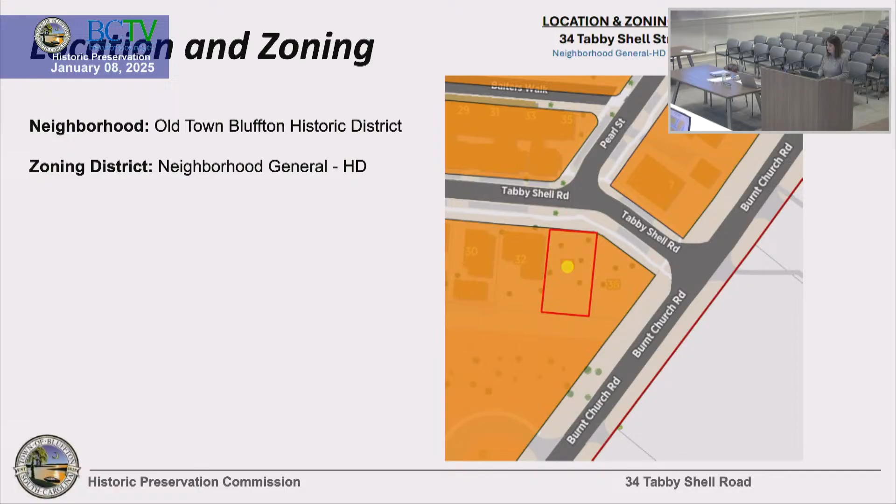Here you see the property. It's close to the eastern portion of the development near Burnt Church Road. An aerial photograph shows the property is currently wooded. And here is the site plan, with Tabby Shell Road here at the top.

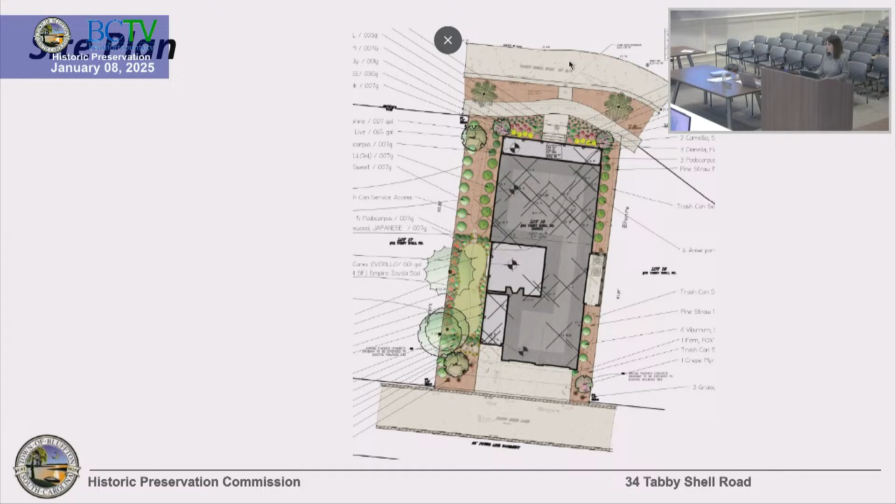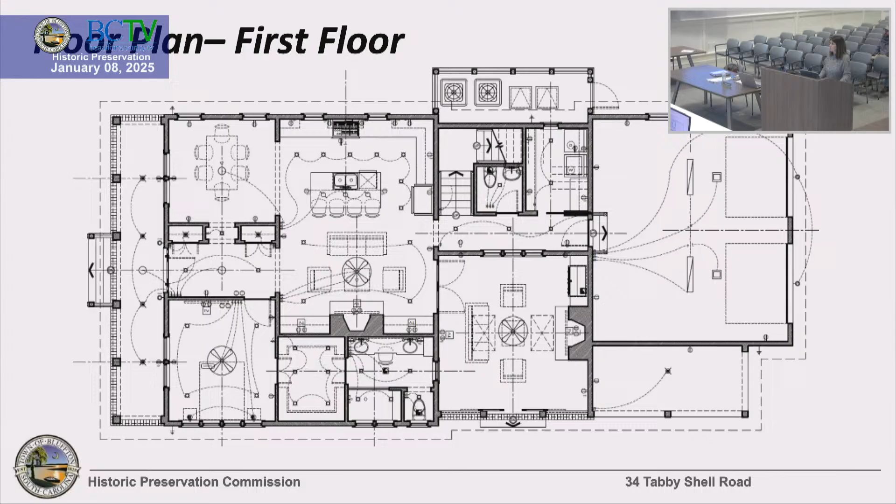Here is a view, and I'll go through these quickly and we can come back to them: the front view, the left view, the rear view from the alley, the interior view of the back of the house and the carriage house, the view of the left side of the building, roof plan, building section, foundation plan, as well as the floor plans, wall sections if we need to see them, the door and window details, and the review criteria. All of the review criteria appear to have been met except for the items that I'm about to go over.

Based on what was resubmitted, there are some detail items that we need. For example, identifying the type of the tabby stucco, or whether it's going to be a stucco with a sand or steel trowel finish—that needs to be identified on the plans. We've asked for a door schedule to identify the types of materials proposed for the door. We are also asking for an additional column detail, as what was presented was a little bit difficult to read.

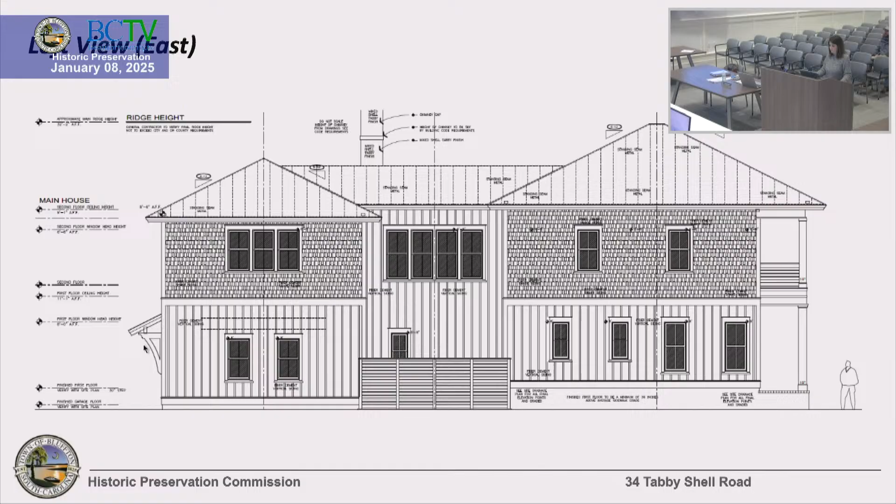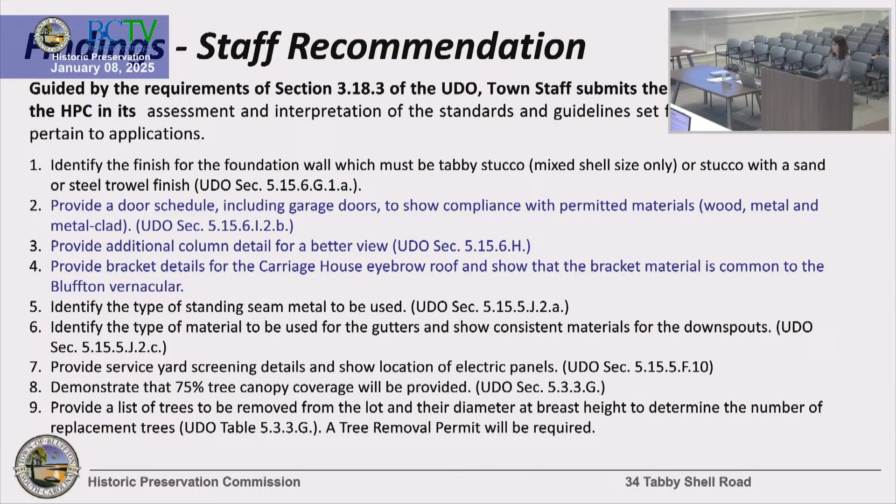Additionally, provide bracket details for the carriage house eyebrow roof and show the bracket material common to the Bluffton vernacular. I did not see that on the plans, and you can see the bracket detail here in the back over the garage. Identify the type of standing seam metal to be used, the gutter material, and provide service yard details showing the location of the electric panels. We'd like to see that 75% tree canopy coverage is provided, so that will need to be shown on the final submission if the COFA is approved tonight, as well as the trees to be removed.

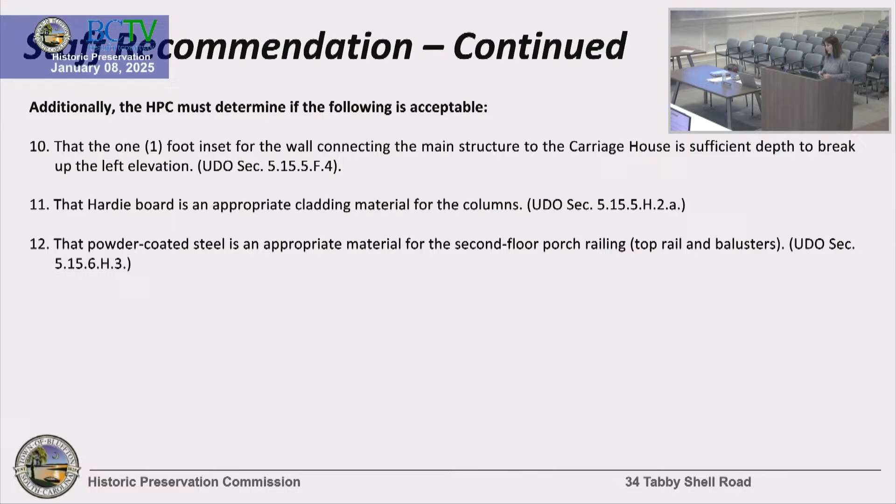I did identify some things I thought needed a determination. They include the 1-foot inset for the wall connecting the main structure to the carriage house—I'll go back to that—whether Hardie board is an appropriate cladding material for the columns, since it's not identified as being permitted by the UDO, and also a determination that the powder coated steel proposed is an appropriate material for the second floor porch railing.

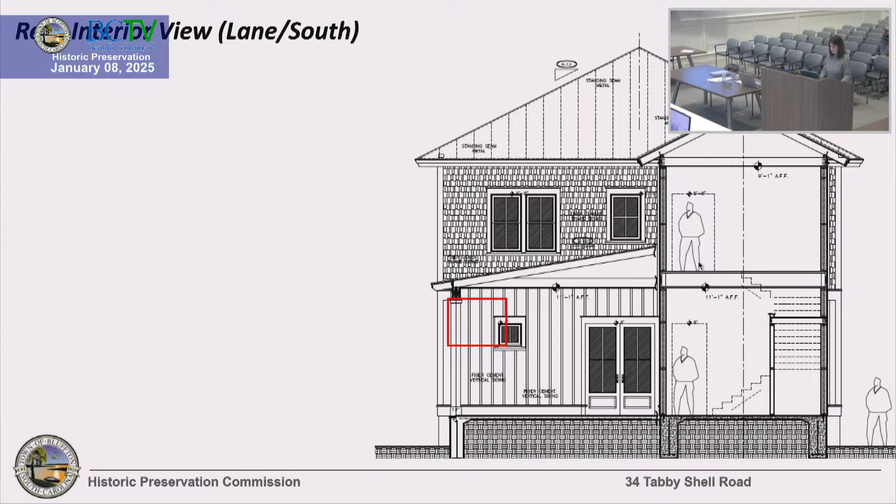Let me go back to that, and you can see here in the porch railing—let me show the front elevation so we can see that a little bit better there.

And after I was putting this together, I did notice, looking at the window schedule, that the windows I've identified here in red appear to be awning, and I think maybe the applicant can speak to that. But other than that, that pretty much is my presentation.

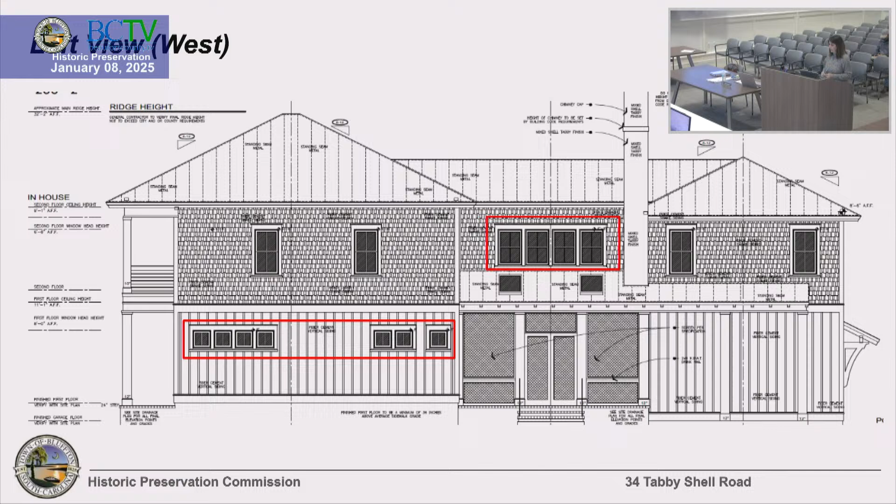You can choose to approve the recommendations of staff, you can have additional conditions, or you can deny what has been presented to you.

Any questions for staff? There was an application page in the packet, like page 3 of the application, there were 2 copies, and there was a red note in the top that one was different than the other. I didn't see any differences.

Was that something you annotated? It was, yes. I'm sorry, I'm trying to recall, it might have been a number change. There was something, it was a very slight thing. But as far as all the square footage, you checked that, and that's all in compliance? Okay.

In the comments, a couple of them were in blue. Did that indicate anything separate? In blue, do you mean that I just went over? Yeah, your recommendations. Yeah, those were the things that I focused on. I didn't want to get too far into the details of materials. Those are kind of standard things that we include, and it's really more for the applicant to provide final submission.

Any other questions for staff? Any questions for the applicant? Does the applicant want to present at all?

We're happy to answer any questions. We made a list of the things that we had discussed last time, and I think we've addressed all of them. If you could state your name, for the record. I'm Graham, and this is Preston Glover. And you are the applicant with Alley Construction Group.

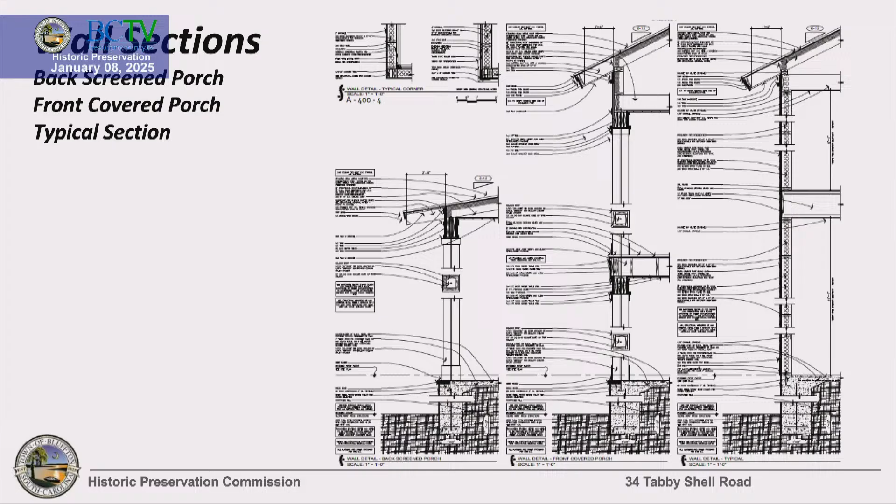I can't see on this computer, I'm sorry. Can you blow that up? Kind of the middle. Go down a little bit, and it's going to be legible. Which one is it? Is the middle? So the second floor right there - right there? Middle one, yeah. Can you zoom in? Can you see that writing, or is that probably going to be pixelated?

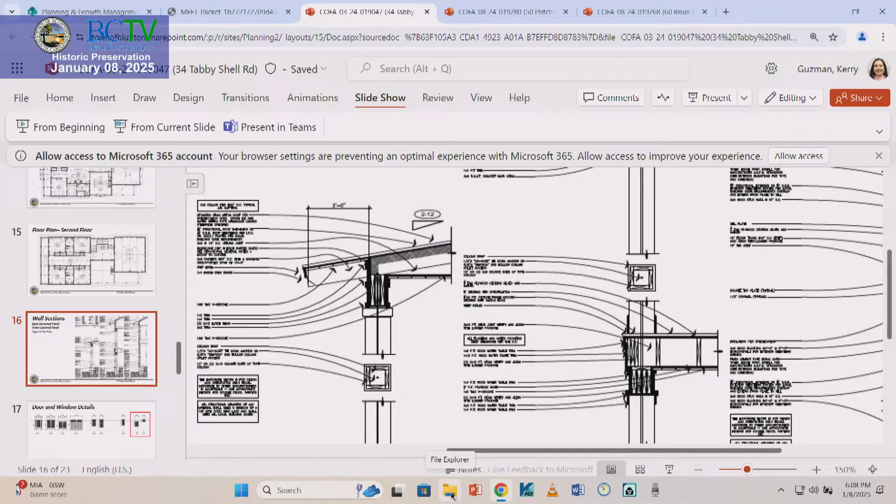Charlie, are you able to pull up the actual plan set rather than the PowerPoint? I don't know if I can get to it. Can I get to it from here, Kerry, do you think? What's it in? Yeah, so we have the plans here as well.

Just looking at that detail, it's called out as 5/4 decking on top of 3/4 inch tongue and groove plywood decking, glue and screw. So I think Tim's question is, there's a lot of banding going on there, and that's an odd way to do the waterproofing, and that would potentially, if you put it on sleepers or something, that would really affect it. So you'll have a slope you gotta create - so that'll be one sleeper, and then you'll have another sleeper on top of that, so the water can drain in between it. So my concern is that banding will get really tall.

Because there's more depth in there than what's showing. Understand what I'm saying? Yeah, to be honest with you, I haven't thought much about that. I knew we're probably gonna do a waterproof membrane there, and I didn't necessarily know if we were going to be doing decking on top of that membrane or just leaving it a membrane.

But if that's what he's got in the plans - it's called out as decking. I think it needs to be decking, I don't think it can be a membrane. Yeah, I mean, I think it would be unexpected in the historic district and in Tabby Roads to not have some sort of finished flooring on the second floor. Right. Yeah, then we would do 5-quarter pressure treated decking.

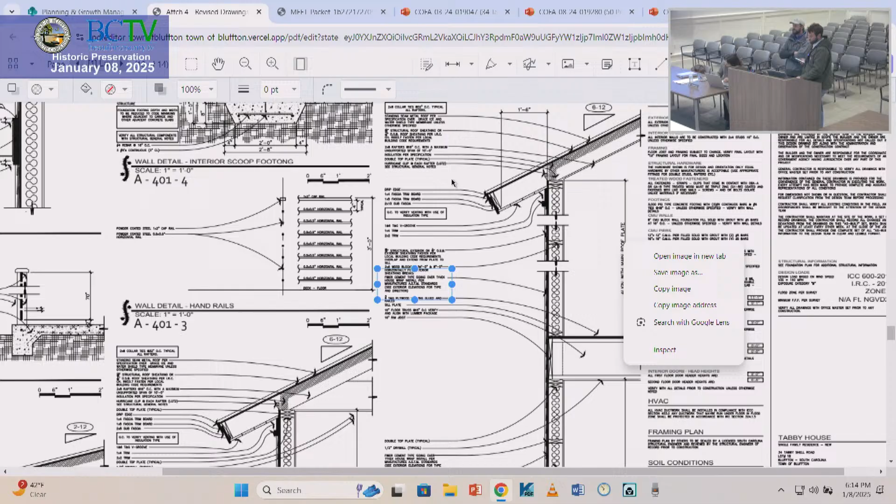So other than just clarifying on the detail that the top is shakes and the bottom is board and batten and the band board - that needs to represent what's actually being built. And that calls out the board and batten's spacing, the pieces need to be called out, what the actual board is, basically all that. And then the band board calls out what the sill is that's on top of the band, all that stuff called out and detailed.

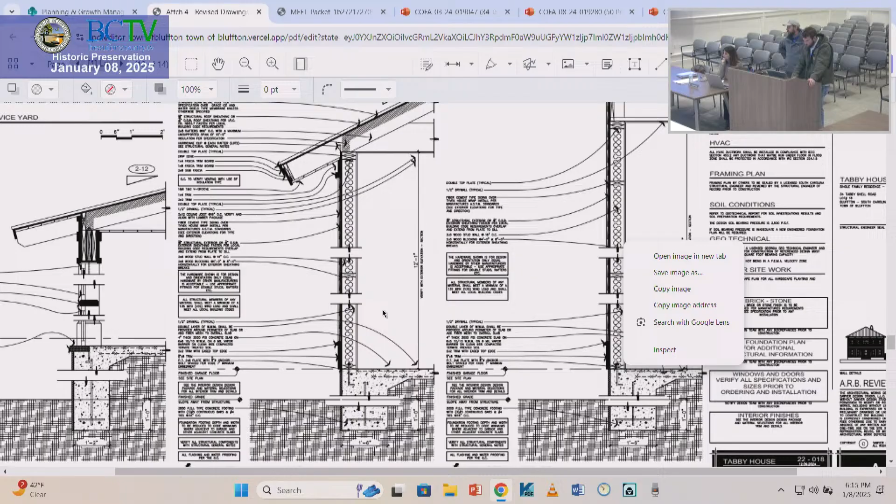The column details are updated as well, but they're just graphically shown, not actually called out with parts and pieces. And then when you look at the top of the porch, they removed the bracket, they kept - none of the bearing height or anything is right, so it doesn't really show, and all the elements are hidden. So like this one that you're pointing at right now - that one - none of the parts and pieces of the beam trim are called out.

Size, spacing, anything like that. But it is graphically a better representation of what's going on, I think, on the second floor porch. This is the screen porch detail.

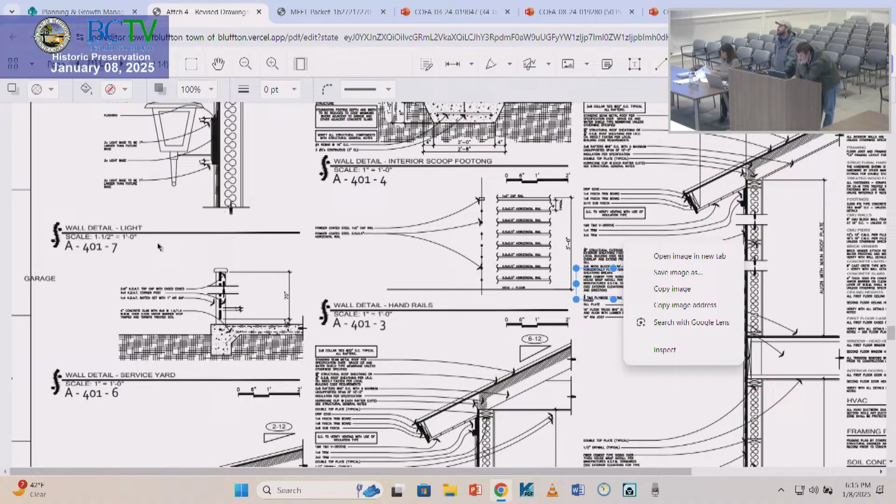Yeah, but if you scroll up to the second floor porch, I'm pretty sure it's supposed to have a similar height to that, but it is like 2 feet taller with some board and batten siding shown that I think from the elevations looks like it doesn't exist.

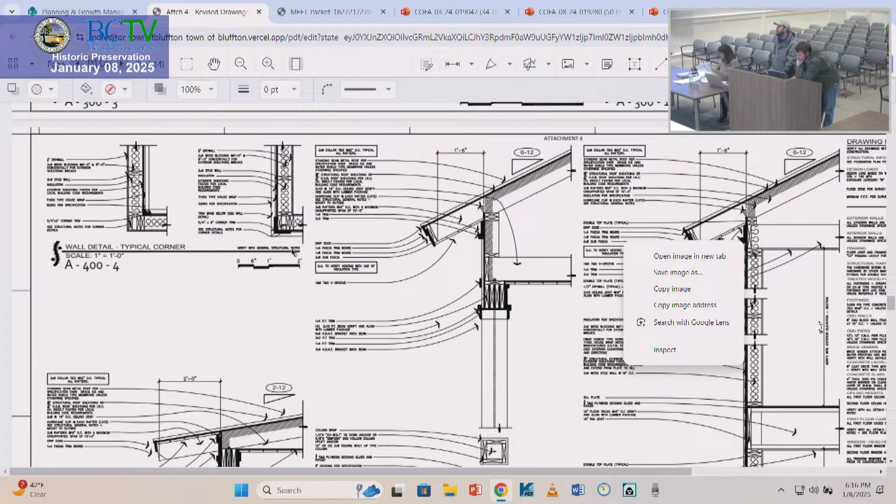Yeah. If you keep scrolling up. Keep scrolling up. Yep, that top in the middle, right there. This piece here. Yeah, I think your roof, I think there's, when you're looking at the beam on the porch,

and then the ceiling, and then the top plate there, I think the roof, visually from the elevations, looks like it's sitting on the sill plate on that little knee wall, but it's another taller, and there's siding in there that's not called out, but I don't think any of that siding exists.

I mean, it's hard to. You're talking about this siding here? Like the frieze board and this piece right here? Yeah, but that stuff beneath it, if you look on the elevation, none of that siding is.

Well, you wouldn't be able to see that from the elevation because the eave covers it. We're talking about like this where it calls out the 1x4 trim and the 2x2 trim, the frieze board. On the elevations, it's like the bearing is another 2 feet lower than them.

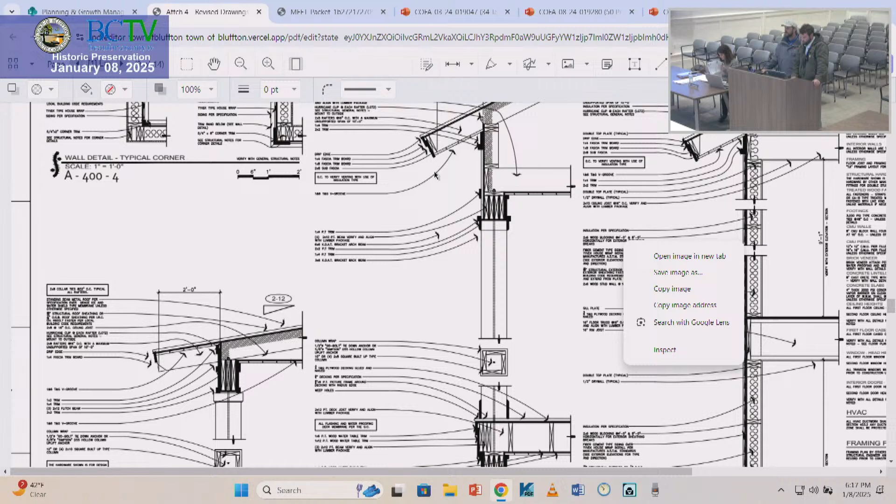I think, when you look at the detail in the center and where that beam is, and you look at the detail in the bottom left and where that beam is and how that trim stacks, that trim stack looks more like what is in your elevation on the higher pitched roof than the one in the middle.

This bottom left one here? Yeah. Uh-huh. Yep. That's right. I mean, there's definitely more height space on that.

So I think the larger concern of what we're talking about or getting at with all these is that we're not quite sure what we're approving based off of the details not matching up with the elevations.

I think the last time you guys presented, we suggested you might ask for a meeting with the HPRC and sit down so we can talk about these individually. That didn't happen, and I think that would help you guys a lot.

The timeline on this project has pushed in near 2 years that we've been sitting with the town. Yeah. We worked with Katie for a long time, and she dropped the ball many times. I know she's not here anymore, but a lot of these things could have been addressed a year ago.

Well, at the HPRC level, we're not reviewing, I mean, it's an elevation and floor plan review. Right. We've seen these details at this level once, to my knowledge.

You guys went around in circles with Tabby Roads. What's that? Because they're requiring things that you guys aren't approving. Well, no, I'm not sure really what's going on. I know we made a list last time when we were at this meeting, and I thought we addressed everything on the list.

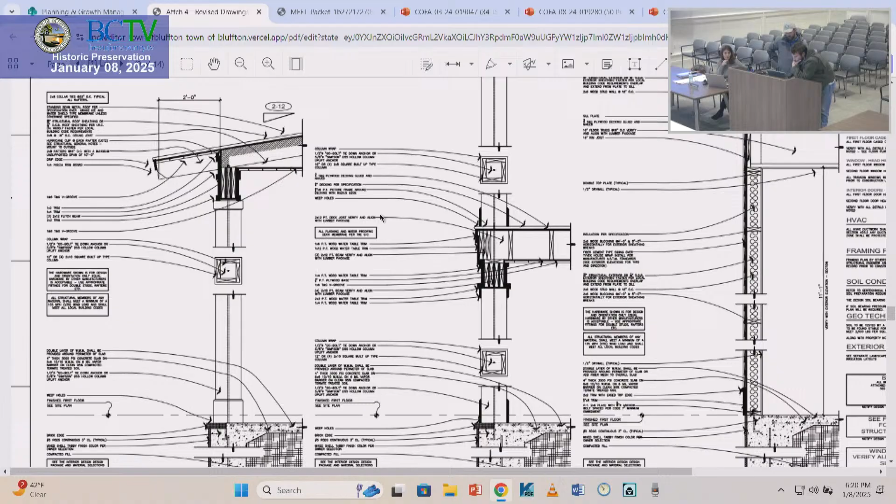I know you guys have taken a lot of time in the review process. Not all of it has been HPRC's, but this is the second time you've come in and told us you're not going to build on the plans you're submitting. Look at the plans, there's obviously small discrepancies. This is the third property we've built in historic downtown Bluffton, so we have a pretty good idea of what's been approved and sold for $1.4 million.

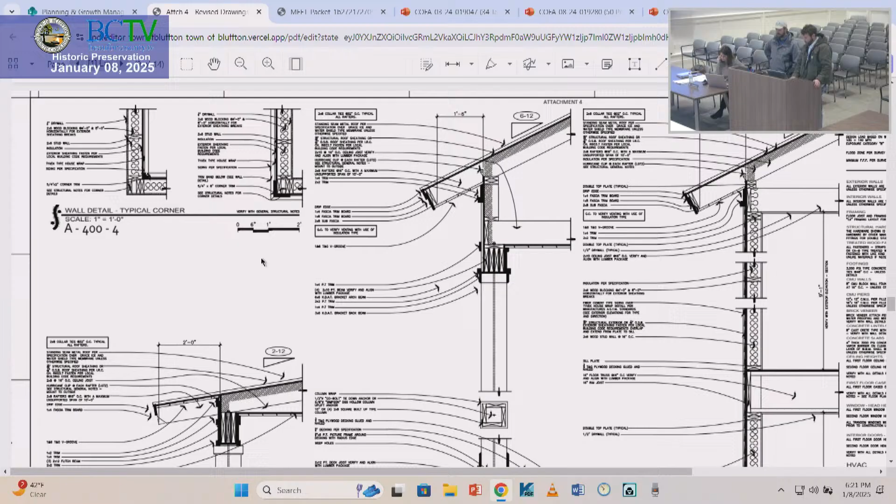And this one, like I said, the siding guys, our siding guys, we just scale based on, and typically also with ARBs and this architectural review process, typically that's what they're looking at is the elevations.

I understand 100% you want this to be right, I'm just trying to figure out exactly. So that scale right there doesn't match what's on the elevations. We're not scaled, but if you look at the elevation, it looks like that whole soffit is 2 feet further down.

Because if it gets built like this, you're gonna have this weird thing that's not really called out. I think what you really want is a column or a beam, and then you want that roof sitting on there so it looks just like a beam. And this thing, it looks like there's the beam, and there's siding or something that's not specified above that, which is not what we want.

What's probably gonna happen is these ceiling joists for the deck are gonna hang off of this column, or off of this beam, and the rafters will probably sit on that knee wall. I think that plate, there's probably one piece of plate on top of that. In actuality, yes, the ceiling joists of the deck will hang off of this beam, and the rafters will sit on that beam and be anchored to it.

Okay, so this needs some adjustment here. I think by that picture or the elevation, the plate is the plate of the header, and then that joist is notched out. So the ceiling joist plate is sitting on the plate of the header, not on top of the plate of the joist. So that whole thing, I think it's way down. I think that joist is actually sitting on the header plate where the top of that rod is.

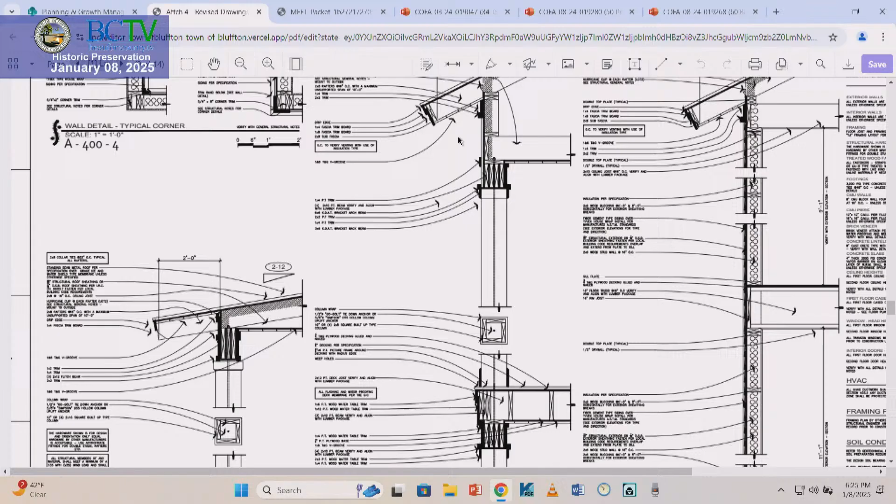But other than that, is there no way we could approve it with conditions and get those fixed? Well, even there, you said it might be a 1x10 or it might be a 1x8. That's a small thing that can change, but you start to stack all those up, and then we end up with a project that could look very different from what we approved.

And I appreciate that you've done other houses and they've turned out well and sold well, but we take them on a case-by-case basis, and we want to be thorough and make sure that what we're approving is right. Could we address everything that she brought up? Sure, in terms of just making sure we cover all these bases? Yep, that'd be great.

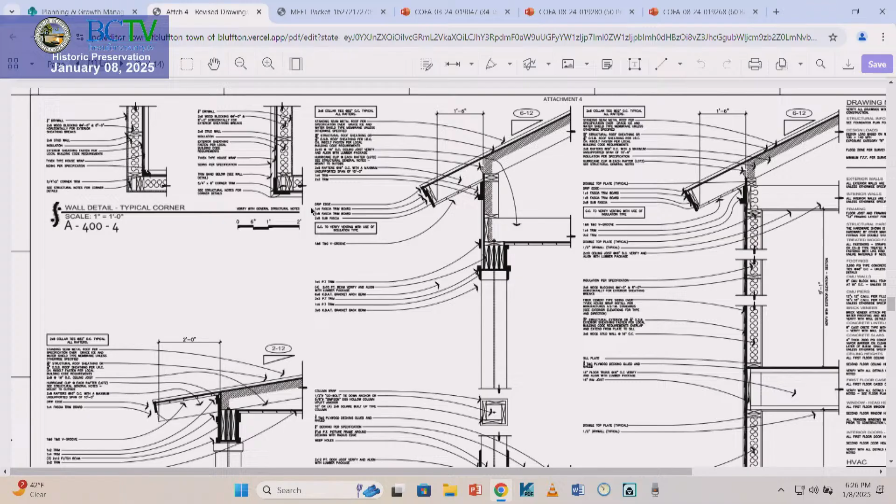So other than the details, the elevations look good to you guys? I think the inset on that corner, the inset that went from 6 inches to a foot, is a welcome change. The bracketed roof over the garage rear elevation helps, as well as lowering it with the scale - I thought that helped a good bit.

What else did we talk about? The 9-foot door at the front changed to 8 feet - looks good. Lowering the roof of the garage, which was the 1-foot piece. We got rid of the faux windows and moved them into real windows on that side elevation. We put them in the location that you guys suggested.

I had a question on the chimney cap rotating. Are you using a masonry chimney, so then that won't have a spark arrestor, so we're not concerned about seeing a metal spark arrestor cap sticking up inside of the bishop's cap?

No, it's not - you're talking about the flue of the chimney being like the masonry chimney? So the flue of the chimney is gonna be metal? Yes. I think I would like to see that chimney cap rotated back, because I don't think from the street you want to be looking at it.

I saw a note, there was a note in the staff report about them rotating it to be away from - it said Bruin Road, which was not right, that'd be Burnt Church. I know, but it said Bruin, that's why I was confused. So, and it says that it was rotated, and there's also a house separating from Burnt Church. There's also a house - yeah, I know, that's why I was confused by that note.

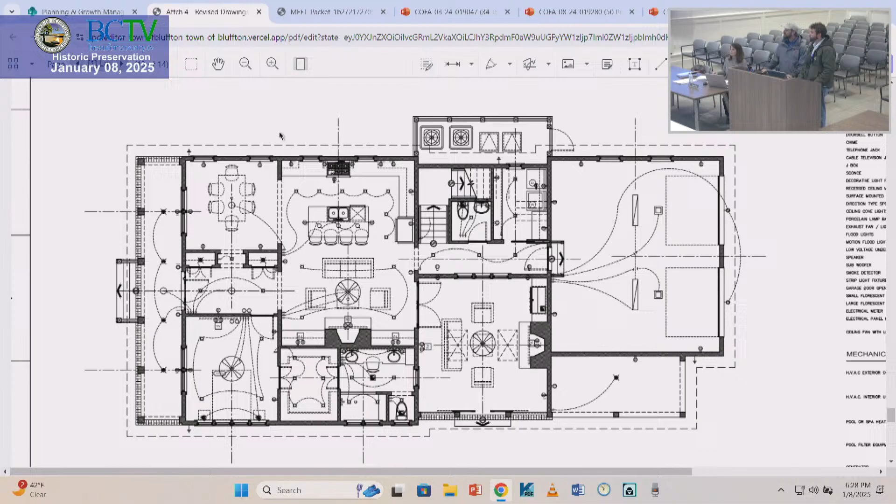Can we go to the elevations? Can you flip to the side elevation? Just a small comment. Yeah, that's good right there. I appreciate that they lowered the roof.

I think I'd probably want that connector to be the same level as the garage. Is there a reason we couldn't move that connector roof down, so the main house reads as the main house, and the connector and the garage are a foot lower? It looks like the windows and everything would be in the same plane, so I don't see why you couldn't lower that a foot, so it reads as a connector and the main house is a little more prominent.

Right, understood. I think this is technically part of this floor here. But the back part, the garage and bonus room, is the same floor height too. You'll actually enter the bonus room from this landing here, and then go up a little bit, and this floor is connected to the main house.

I think that's why we liked that, we talked about it, but I don't think the plans reflected it. The plans look like it's all the same level. Yeah, I remember us talking about it and looking to see if we did it. If that was the case, I would vote that the garage should get considerably shorter.

I don't know whether it is, but it's not. Yeah, they were trying to keep that the same level. Everything's the same level.

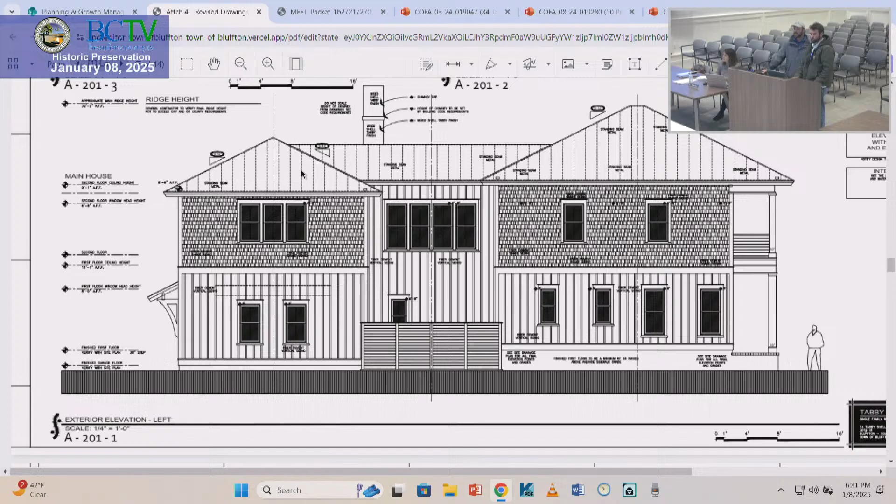Yep. Are we making a motion on this, or can we go back to review so all this discussion can happen there and we can move on? In the interest of getting the other projects before the commission, I don't feel comfortable with staff reviewing all of the changes we're talking about without putting them into a list.

That's where I was at as well. Okay, I just wanted to get it, because that's what I tried to do last time, when we had these big discussions - I got everything we talked about and we made all those changes. Now I see there are some new changes coming up.

So, a bracket detail here, you want to see a bracket detail there. We need to fix those two wall sections - one is mainly the siding, which is incorrect. You want to see a band board callout. It needs to be shakes above and board and batten below. And this detail section needs to get fixed so it matches what's on the plan - basically, the elevations need to match the detail.

But other than that, are we good with the powder coated aluminum or steel handrails? I think we had talked about that before, last time - a couple of spots in that location in the neighborhood. We've done that a couple times in the neighborhood, I don't see that being an issue.

Okay, awesome, and all the other changes we made - pretty much that, and then we'll lower this breezeway roof a little bit. And do you want us to turn the chimney? I think where I'm at is, if Tabby Roads is going to hold strong, that's something I would just approve.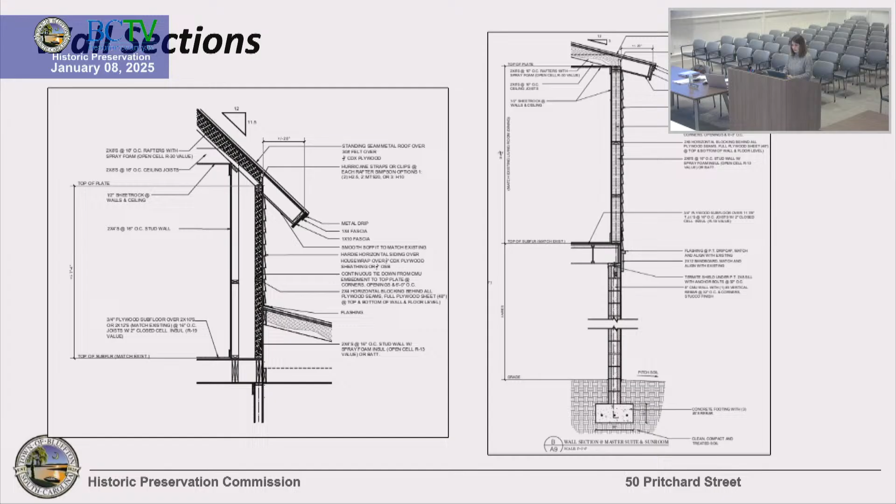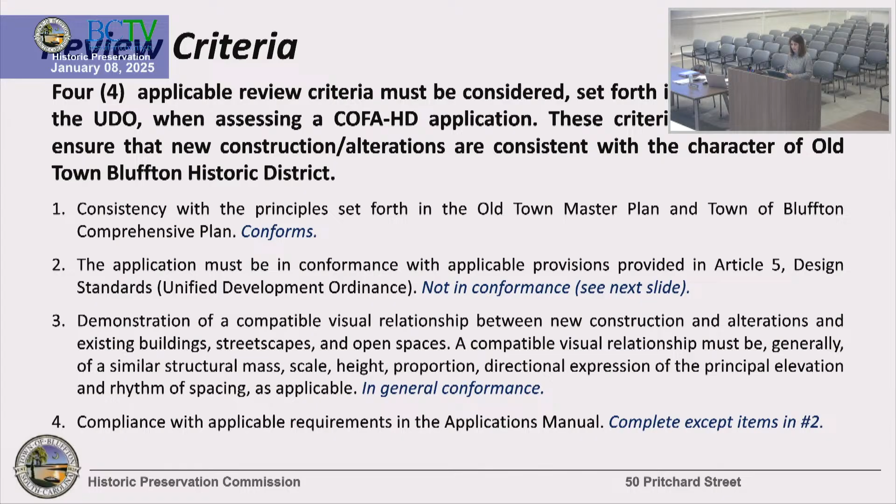Wall sections, porch details, some additional details regarding windows and doors. Review criteria is consistent with, except for a few items I'm about to mention. We need a little more detail regarding the material for the standing seam metal roof, as well as the stucco application. Staff is requesting the commission make a determination that the standing seam metal roof on the first floor addition is appropriate, given the asphalt shingles on the main structure.

Need a determination whether the lack of shutters on the addition is appropriate, given the use of shutters on the existing residence, and whether or not the rear fixed window is appropriate, as it is not a permitted configuration. That concludes my presentation—again, you have the ability to approve staff recommendation, add additional conditions, or deny the application.

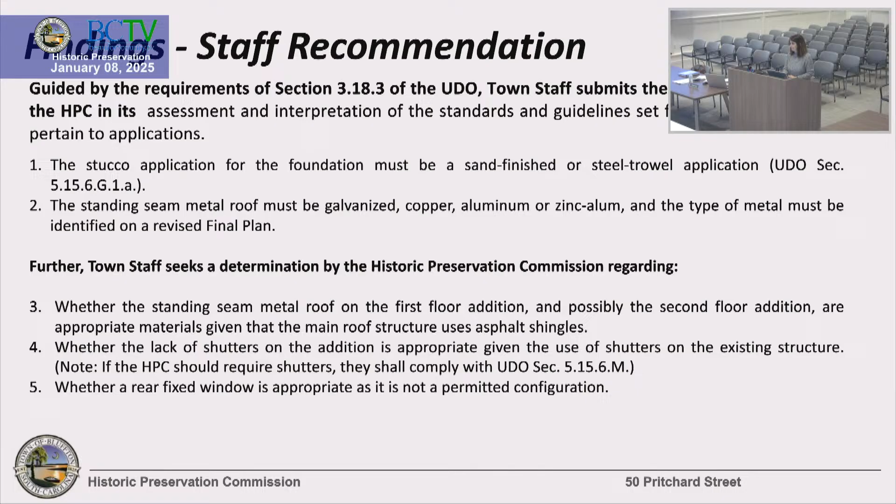Okay, thank you. Questions for staff? Okay, any questions for the applicant? Would the applicant like to come forward?

You can stay there with him. Ansley Manuel, the architect, and Beth McHugh, the homeowner. So,

Well, I'll address the metal roofs on the bottom. Let's look at this one. I don't mind the hybrid of roof materials when the metal roof isn't tying into the asphalt roof. In this case, both roofs tie into a wall, and they're both first story roofs.

Do you want another view? Yeah, we could look at the front elevation again. So you'll see that roof is going from asphalt to metal, and then the wraparound in the back will also be metal.

If you all want to discuss that now, or if I should just go to the next item. Any questions? I think it's perfectly fine to have it on the lower roof, I don't see an issue. Yeah, that doesn't bother me either. Anybody else feel differently? Okay, that should be a non-issue.

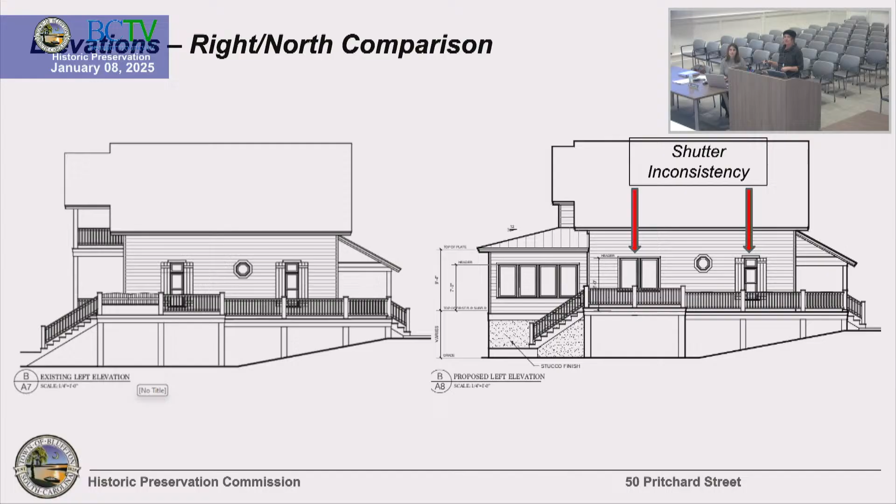So the fixed window, that's in the rear. It's actually not the one you have marked, it's the 3-gang windows, the middle one. I've got 2 operables on the end. We're looking at the 3-gang on the first level, that's in the Carolina room. I commonly do that because the middle one's a picture window.

Would those be sash set rather than direct set, so they'll have the same frame? Yeah, so if I have to make them all operable, I can. It's not going to change the look of the window at all. Right, I guess that's what I was getting at. If it's a sash set window, it's just a fixed casement, not a direct set picture with a real thin frame to it. I don't have any issue with that, with the middle one being fixed.

So are all these windows operable except the middle, is what you're saying? Yes, with the three in a row, I just have the center windows fixed. Yeah, the center one being fixed is fine, it's a pretty common application of that in the triple. Does anybody else have thoughts on that or qualms?

Okay, and then upstairs, the reason I had to even do anything up there is because I couldn't get an egress on that window unless I brought the rear portion of that bedroom forth. That's the only reason we had to do any addition up there.

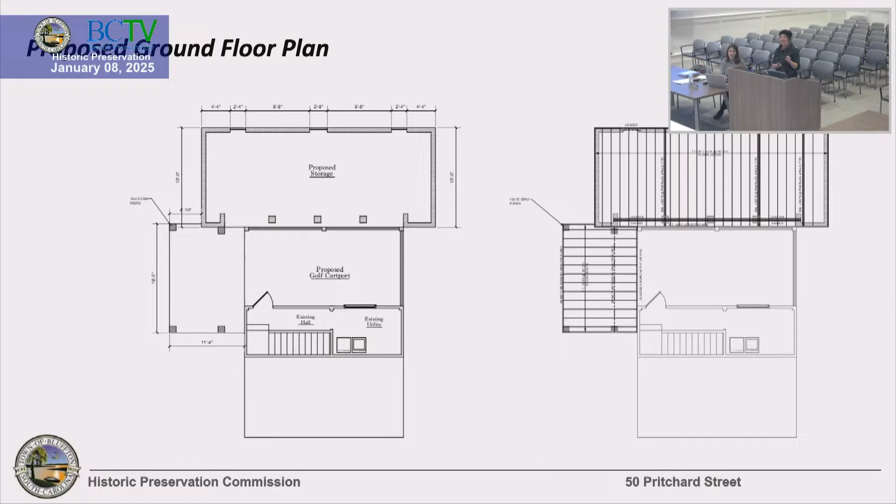Some of the windows have these long shutters, some don't have shutters. You can see the rear doesn't have shutters. There was one more photo of the rear, I think. You can't really see it there. So the rear doesn't have shutters at all, and I'm not so sure I actually think those shutters are very attractive.

But I will, we can have some shutters, they're hurricane shutters, but they do serve a purpose. So we can lose the shutters if that's aesthetically what needs to happen, but I'm wondering, and that's something we can talk about. It seems like one of the things we're discussing is all shutters or no shutters, and what Beth is saying is the shutters that are there function, so that's nice. If there's a hurricane, they can actually use them.

But in the back, I've got so many windows that are multiple windows in a row, it's really hard to try to match shutters with what mostly on the existing house is a single window with shutters. Especially when the new windows are a different style than the old ones too. So I just went with no shutters in the back. Yeah, I don't think there should be shutters on multiple windows. Maybe that single window would have a shutter since it's on everywhere else, but multiple windows, I would definitely not have it.

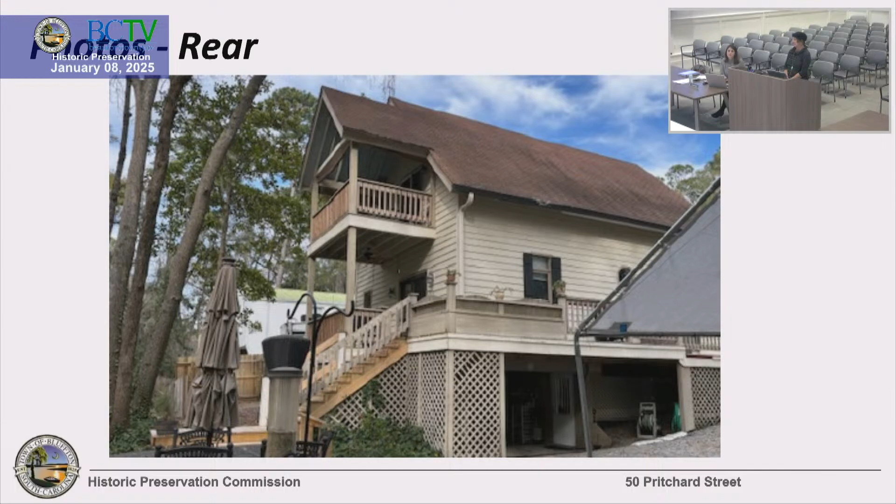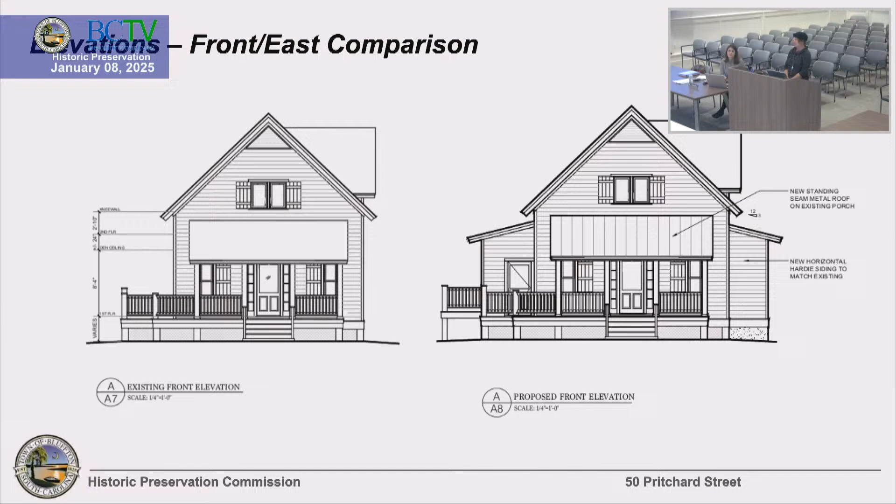And shutters need to cover the windows, so obviously a 3-panel one, you really can't do it. Double, they have to be the same size. It's on the front there, but if you're gonna have a shutter at all, just have that single window in the back, not the doubles.

Yeah, that'd be the only place I would have a shutter. And then does that look silly when all the rest of the windows back there don't have shutters?

Right, I mean, if it's a double window, you wouldn't expect shutters. If it's a multiple window, you would not expect shutters. The individual window is more akin to the double-hung windows in style. It's kind of a transition from the front to the back as you go to the casements that don't have the sash in the middle.

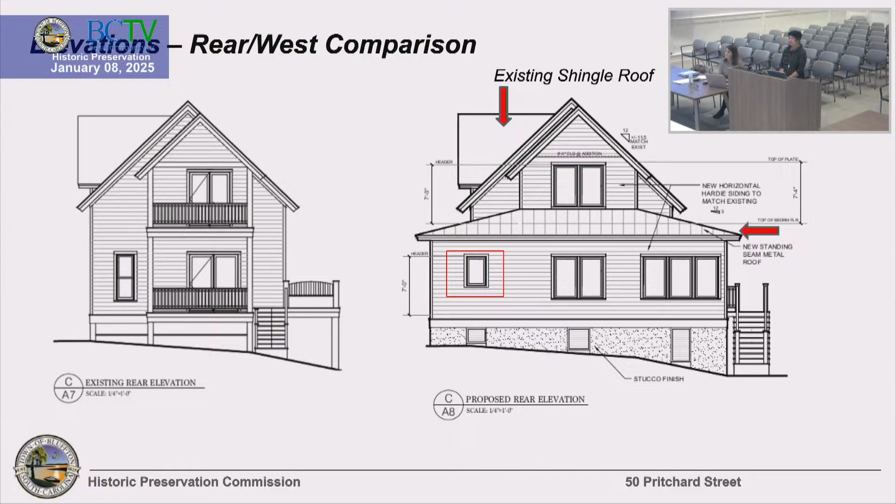Is there any other commissioners? Commissioner Frazier? If it's in the back, no one's going to see it, so rather than make you rip off your shutters that work just fine.

I think the shutters are a nice pop of color as far as kind of the eccentric look of Bluffton. But that window is side by side - the existing window back there didn't have the shutter, so I think that's overlooked.

Any other questions for the applicant? Thank you. All right, then we are looking for a motion.

Or I guess we need to obviously make a determination, but it sounds like we were in agreement that all three of those we were okay with.

So someone would like to make a motion? I'll make a motion to approve staff recommendation. I'll second that. Any discussion? All in favor? Aye. Aye. Any opposed? Okay, the motion is passed as approved by staff with the determinations agreed upon.

I know that wasn't said, but, okay. Second.

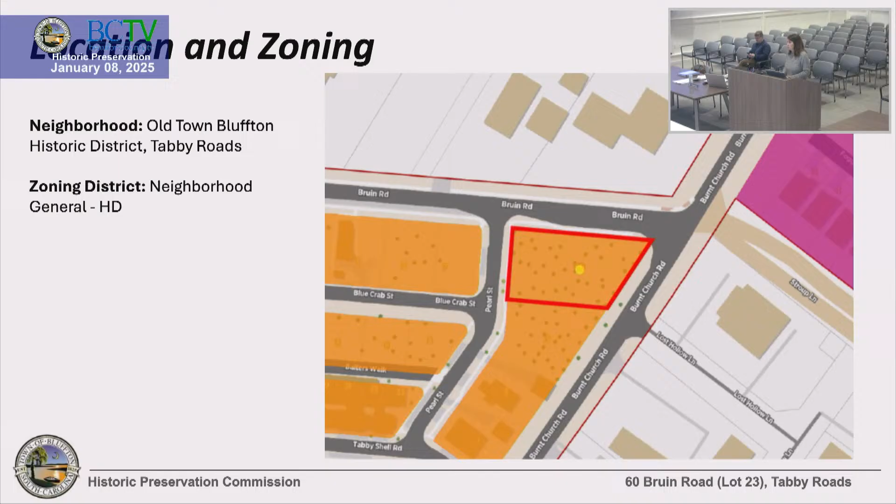Here is the location of the property. It fronts Bruin Road between Pearl Street and Burnt Church Road. We did contact Beaufort County to see if there were going to be any improvements or anything required of the property owner. Due to improvements to Burnt Church, there will not be, so everything is fine.

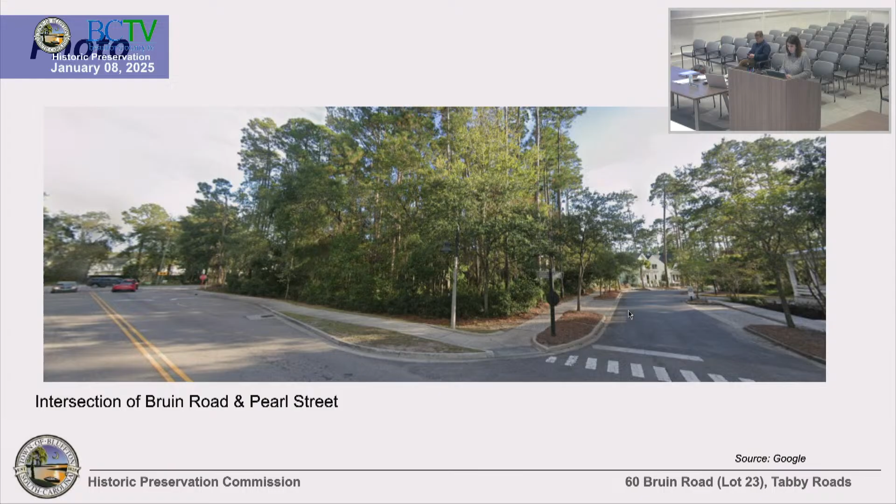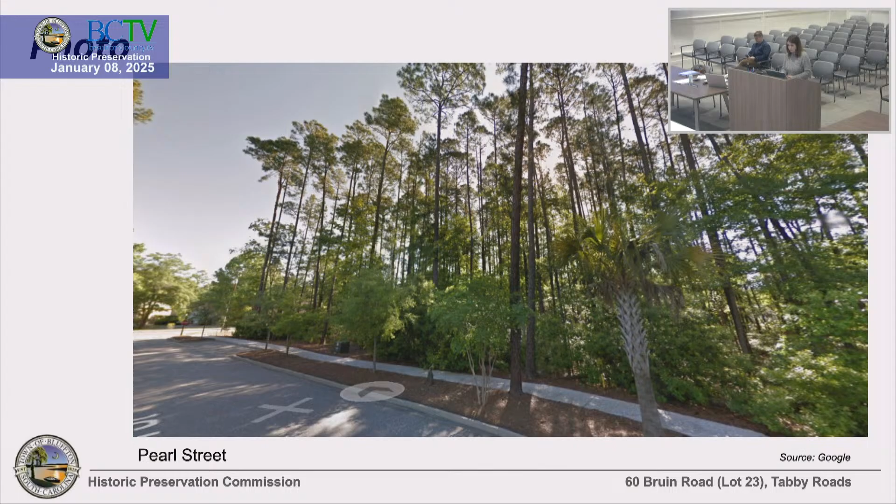Photo of the property, looking at it from Burnt Church. This is Pearl Street here. Another view from Burnt Church, looking at Burnt Church here, looking at Bruin Road. Property is currently wooded. And then from Pearl Street within Tabby Roads development.

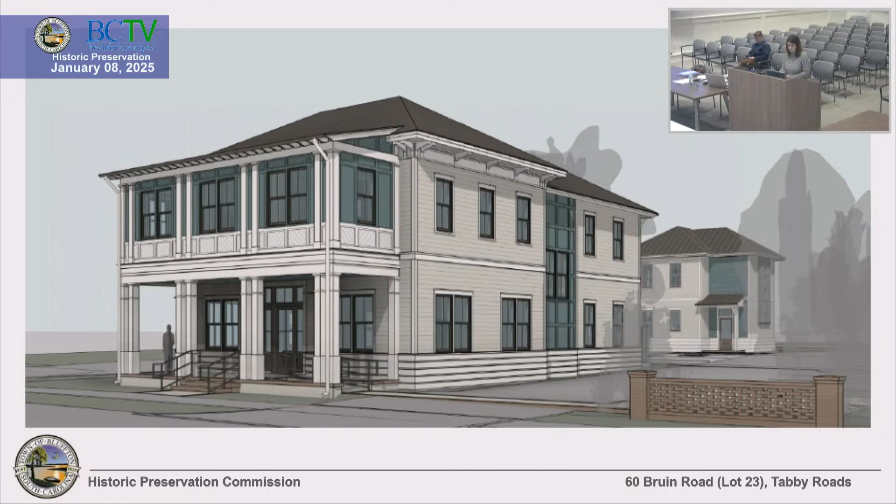Here are some perspectives of both buildings. And another view from the parking lot. Additional views - I'll go quickly through the various elevations of both buildings. The front, the Bruin Road elevation, you can see a porch and a door entrance there. The parking lot view, the rear view of the main structure, the carriage house view - again, this will front into the rear of the main structure.

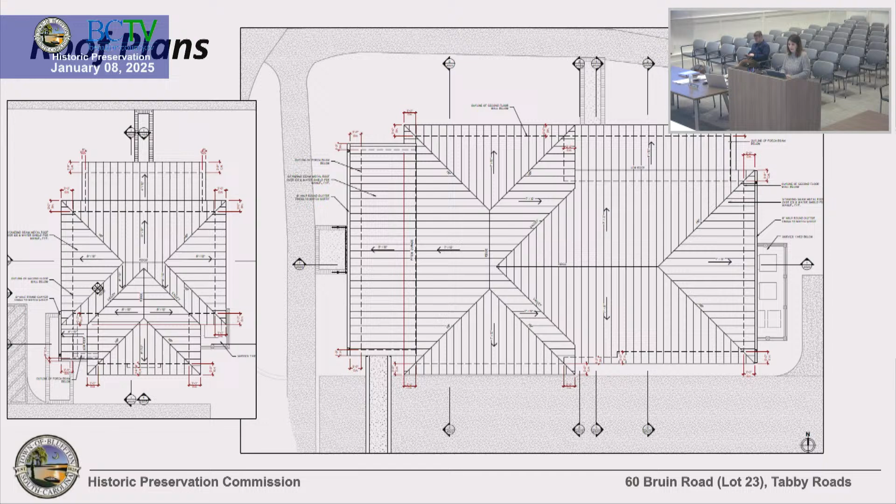This is how it will appear from Bruin Road. The parking lot view, the Burnt Church Road view. We have building sections if we need to go back and see them. Roof plans, floor plans as well for both buildings. Wall section, rafter details, door details, window details, and the landscape plan as well.

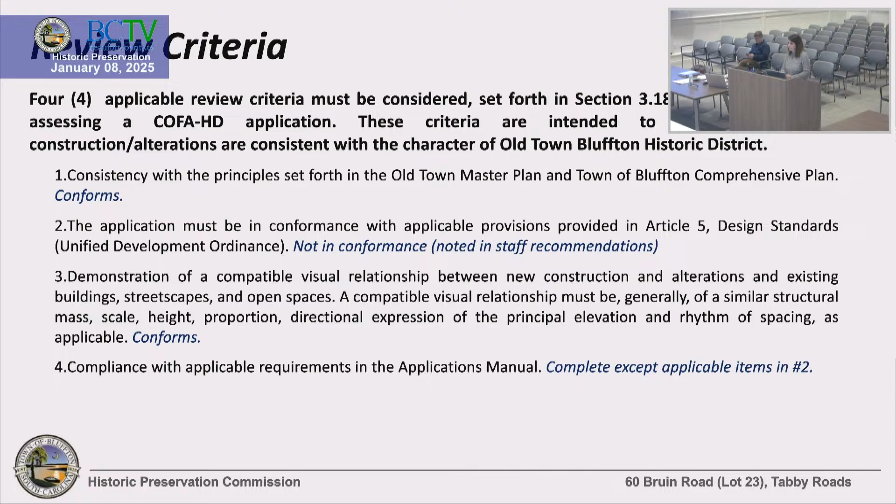The review criteria - what has been provided is consistent with the UDO, except for the items that I will identify here in just a moment. You can approve the staff recommendation, have additional conditions, or deny the application as submitted by the applicant. A lot of these are just detail items, and I think in the future I'll combine them instead of having so many conditions because it looks a little more serious than it really is. The ones I've highlighted are the ones that I want to focus on.

So we wanted to confirm the attic storage space in the main structure, whether or not it's a true half-story, and I need some additional information. There was a sheet that was missing from the plan set, and I want to be able to do that calculation to confirm whether or not we have an additional story or a true half-story.

There are what appears to be slider windows, and I'll go back to that. Excuse me for bouncing around. This was unclear to me when I was reviewing the plan. These appear to be slider windows, and I think maybe the applicant could speak to that.

Align the transom window over the door on the Pearl Street elevation, and that was done for another elevation, I believe, on the Bruin Road elevation, but not on the Pearl Street. Let me go back to that quickly. You can see the transom windows appear taller than the adjacent windows, which is different from what we see on the Bruin Road elevation.

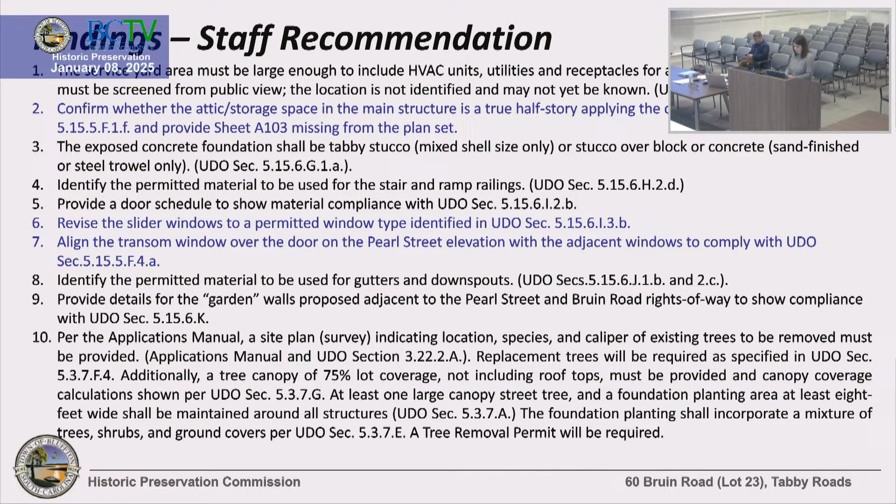I believe there was a little bit less than that, and we may need to have some different trees proposed to meet that requirement. There are some landscape and some hardscape proposed in the Bruin Road right-of-way that will need approval from the state, because that is a state road. There's also a utility easement there, so we just want to make certain that any encroachments are approved by those who hold those easements or the right-of-way owner.

We also want to make certain that on Pearl Street, we have a parking area. The parking area on Pearl Street is going to change a little bit because of the driveway configuration, so we want to be certain that driveway will be able to hold a vehicle and be 18 feet in length. There are a few items that we need a determination on, and I'll go back to this in just a moment.

I'll show you what I'm talking about. One is that the application of different wall materials at the ground floor on the main building was a little bit of a concern for staff, and felt more appropriate for that to be a determination of the commission. We'll go back to that in just a moment. Also the applicant is proposing smooth face Hardie panel for some of the soffits, which is not permitted by the UDO, so those two items would need a determination.

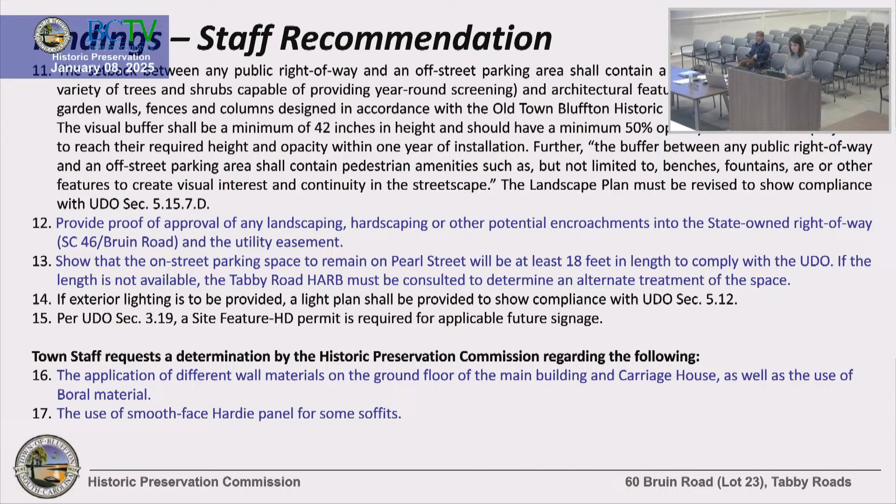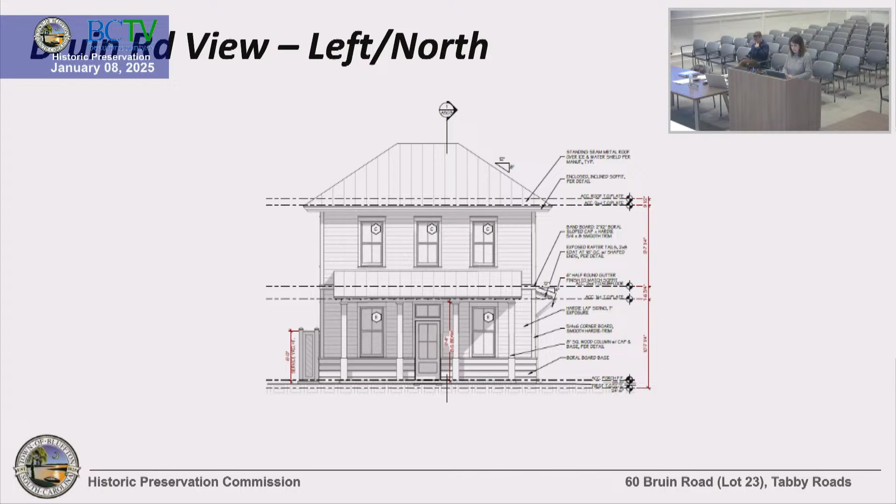Let me go back quickly to show you the wall main building. You can see, for both the carriage house and the main house, this kind of a base detail around the bottom of the building. It's a board base, and because it's a different material from the Hardie plank, staff would be more comfortable if the commission would make a determination as to the appropriateness. So I've gone through that pretty quickly. We have a number of conditions and then those two determinations.

Great. Thank you. Any questions for staff?

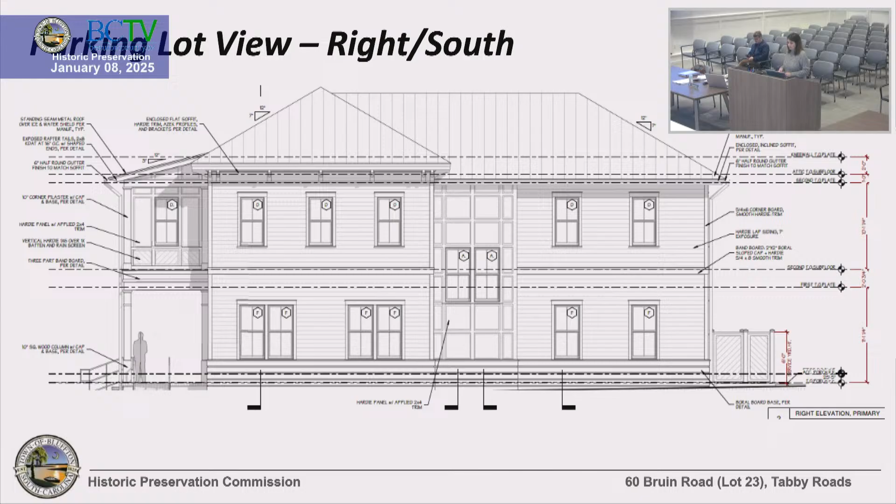Charlotte, you mentioned that parking spot on the on-street parking spot needing to be 18 feet deep. If that is not 18 feet deep, do they need that spot to count for the parking calcs? I didn't see the parking calcs. So they do, they're off-street. They do comply with the off-street parking requirements.

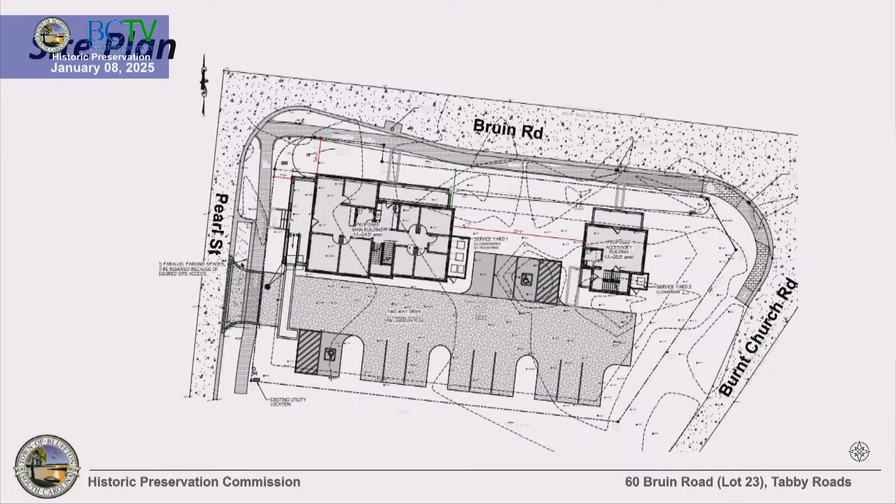Okay, and if there's anything that needs to be reconfigured with that parking space, I'm trying to find my landscape plan. So that could just be grass. It could be, we'll work with Tabby Roads, with the HARB about what to do with that particular space, and that's their private property, so they can make the determination what to do with that. And you can see it right here, the driveway apron. It's a little odd shaped for the parking area, or parking space rather.

All right. Anything else? Is the applicant present? Yes.

Good evening, I'm Sarah Keppel from Pierce Scott Architects, and I'm happy to answer any questions, or we could go through the list of staff questions also. How would you like to start? If you have comments on her comments. Go ahead and start there.

Sure, so the first question was make sure the service yards are large enough. I have sized those and put approximate mechanical units in there and meters and all that. The second one was about the attic storage space up above, so let's go to a floor plan maybe.

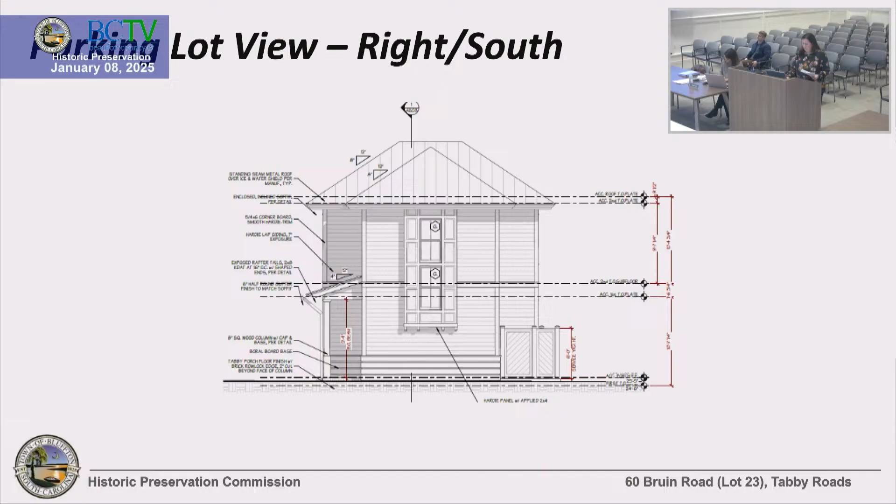Okay, the building section would be better. So this is all under the roof, there are no windows up there. The knee walls are 5'6" tall on the ends. What we're intending this for is the clients want to have storage space up there, and we've also carved out a section for mechanical units. If you need a floor plan, I can provide that so you can double check, but that was the intention. It's not usable space up there.

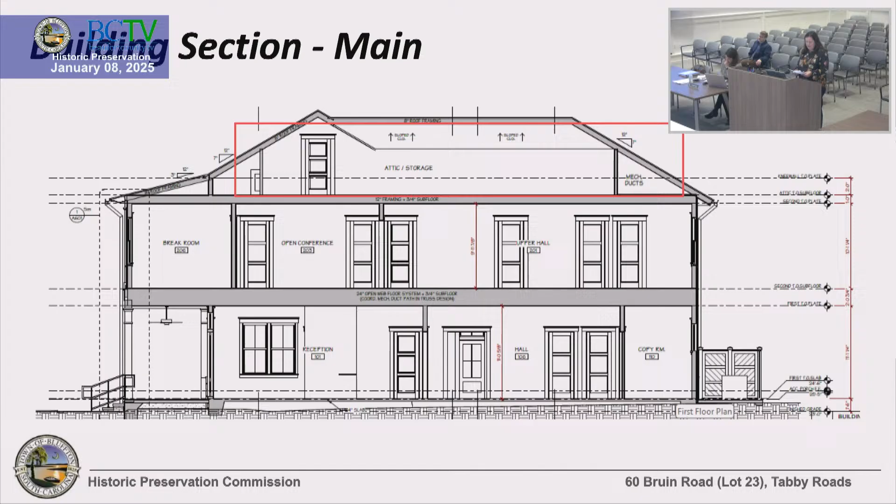As far as the boral detail, the intention is that it goes to grade, where it's applied over the foundation. That's why we wanted to use the boral, so it's not affected by being close to the dirt or anything. Thought that would be a nice solution for that.

That also evolved because the board at Tabby Roads really wanted us to put this building 3 feet tall to match all the houses around it. I guess this is the first commercial building going in there, but this lot is zoned for it - it's actually one of the biggest lots in Tabby Roads. So as a compromise, we proposed this base so that it will have the presence of a tall base like the neighbors, but we were able to put it closer to the ground. So that was the idea there.

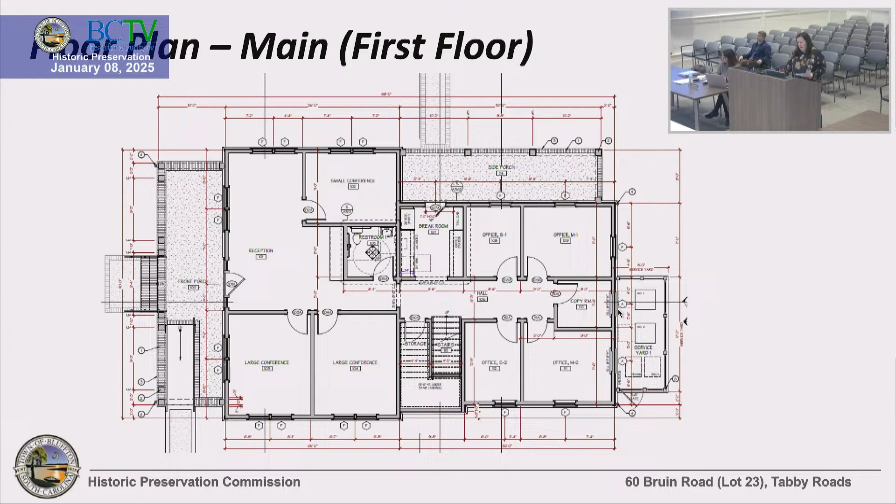Number 6, the slider windows - these are not sliders, they're actually awning windows. Let me show you that elevation. These two A windows are just smaller, high awning windows, primarily because it's in the service yard, and I didn't really need the office and copy room looking out onto that. So that was the purpose there.

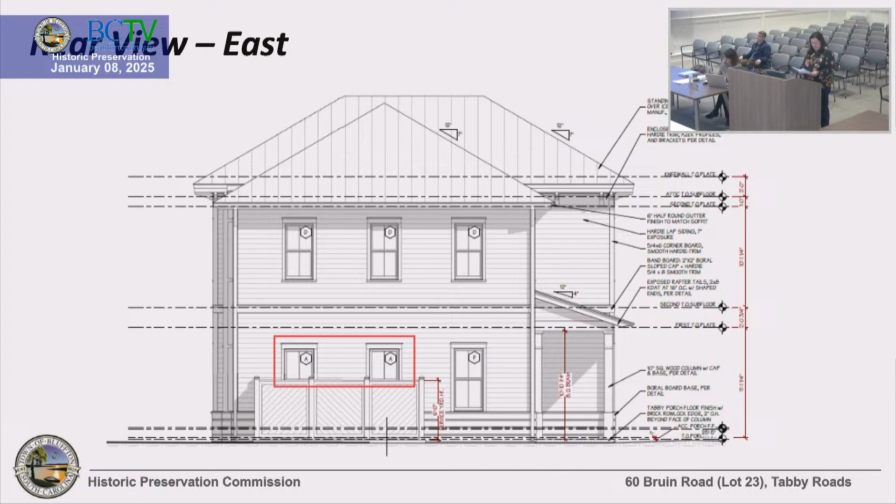The front door transom - the difference in height was asked about. We would prefer to leave this higher door assembly at the front of the building. We thought it needs a bit of hierarchy, and historically buildings don't have their door assemblies and windows necessarily aligned. That's pretty typical, and I have pictures of that happening all over downtown here, Bluffton. So I would just request that that is approved, or that's okay. That is the main entrance to the building, and the other porch is just secondary egress access, but not intended to be used on a daily basis.

The material for the gutters and downspouts is to be metal.

It says provide details for the garden wall. There are details on the second page of the landscape plans, and I didn't see that in the packet, but I double checked and that was submitted with the landscape plans.

There's a note about providing a site plan and survey showing the size of trees and everything. We did submit that, I double checked, but it wasn't in this packet. Any trees that are to be removed was all noted on the landscape plan.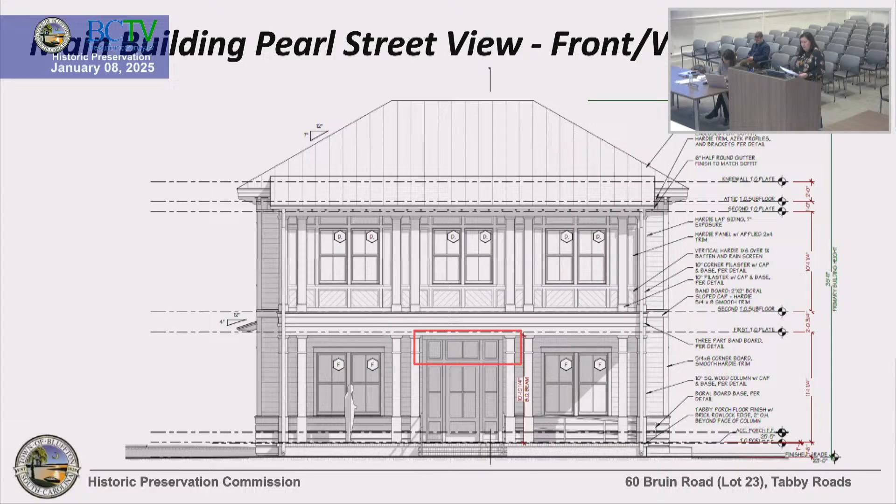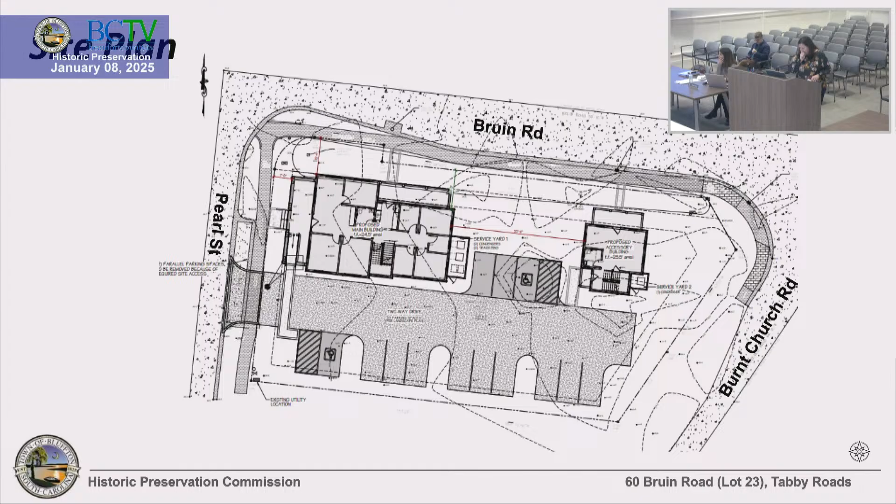Provide proof of any approval of landscaping or hardscaping in the state-owned right-of-way. So coming back to the site plan, zoom. All right, so the right-of-way, actually, why don't we show this on landscape plans? That would make more sense.

So the right-of-way is pretty much, we're sitting on the right-of-way with the primary building towards Bruin Road. So yes, there are plantings called out there. The only hardscape we have are the two sidewalks that would connect with the existing sidewalk running along Bruin Road.

So I guess I'm not sure what the process would be to make sure that's approved. Does staff have any recommendation? Yeah, we'll assist you. Okay, all right. But yeah, we're happy to check on that. We were just trying to follow the planting levels that were required around the buildings.

And then the on-street parking that was discussed on Pearl Street, what we're seeing in this view is actually the underlayment of the existing survey. That site has been noted in the landscape plan and the architectural site plan as being removed. Tabby Roads is aware of that. We actually have added 2 additional spots in our lot to help ease the concerns of Tabby Roads, so we would not have anybody park on the street.

But there wasn't any room. By the time we had the drive width that we needed, and then we still have to be a certain distance off of the state-owned road, which is Bruin Road from the corner there. We didn't have many options for that, so that parking spot doesn't exist anymore.

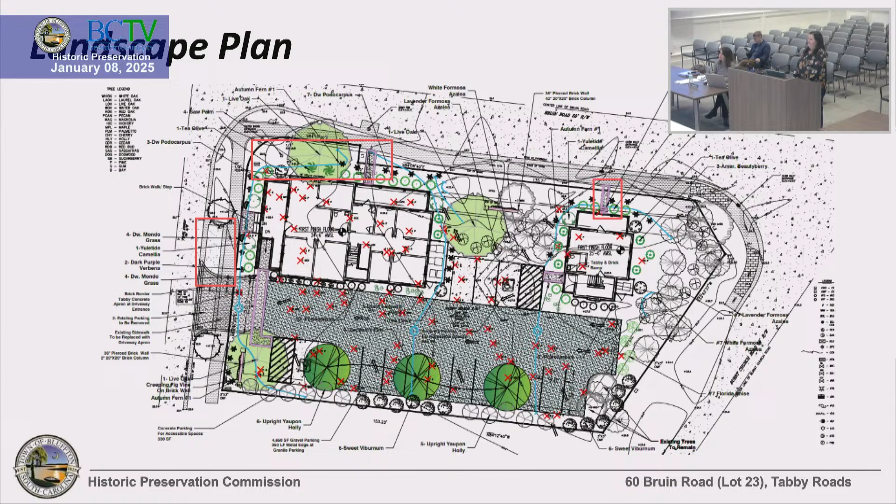Thank you. I just would like to jump back quickly on a couple of the dimension comments. I think staff would appreciate if you guys would just do a quick diagram in the attic to show you're under the 70%, that's easy.

That's not a problem. I have a plan of garden wall detail, I see that, but it's kind of dimensionless, so is that in this? It looks pretty consistent. Okay, I've got the plans up separately here. Okay, so just have them add more detail or information to it.

So just a calculation there on the solid void would be appreciated. And then he did provide a tree canopy coverage, but nowhere on that sheet do the calculations appear to be the tree calcs. So there's a green shaded plan, but the only note on there says 53%, and I'm not entirely sure whether that is lot coverage or whether you're short on the tree canopy.

So I think we do need to address that one more time for clarity in that tree calculation. Yep, okay.

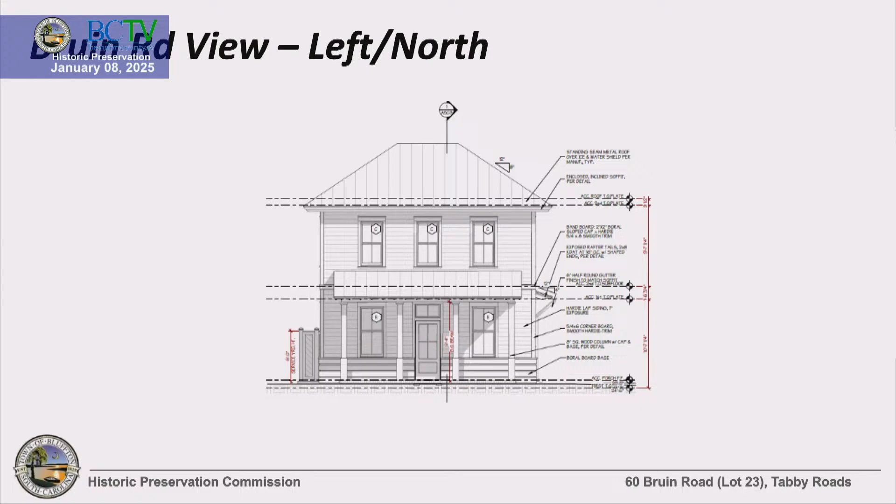Is there any reason you couldn't have a window above that door? That just looks like a blank wall. That would be a stair. It doesn't look like on plan there's any issue with that, but it just feels like it's too blank for that entry. Yeah, we just, from a program standpoint, didn't need one. If we do add one there, we'll probably add one on the opposite side too. That's fine, it feels like it's a little too blank for the entry.

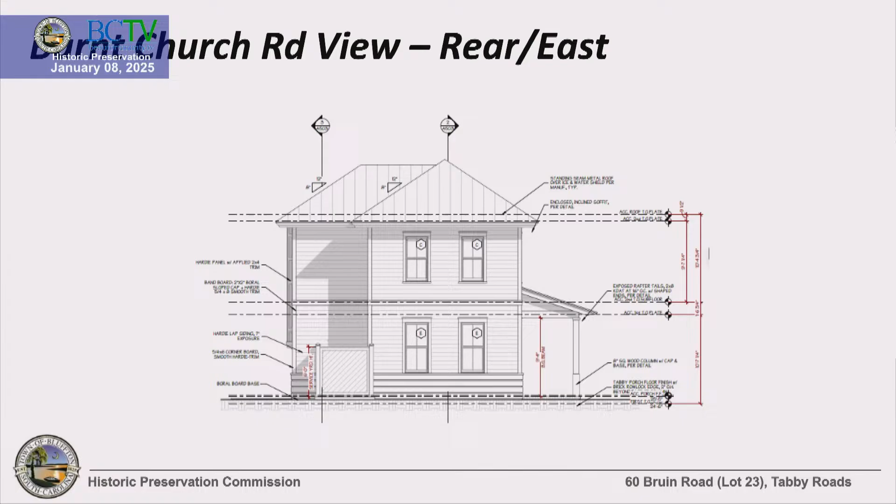And then one last thing, if you can go to the porch section. Like a wall building section of it? Wall section. Yeah, right there, okay, with the enclosed porch.

I think that the slab needs to be moved out a little bit because that column is right on that edge of it. And then the trim is beyond the edge of the actual, once that brick's there, you're really going to have a quarter inch. I think the slab needs to be moved out, it's too close to the edge, I guess is what I'm saying, that column.

Typically what we would aim for is the face of the column aligned with the face of the structure below with the concrete. And then by the time we've added that base, it does appear to be going further. Yeah, I think this would be fine.

We could extend it maybe an inch or two, I don't think it needs to be much more. We just don't want it to, in reality, get built over it, that's what we don't want. You have the base on there, it actually gets over the brick, it looks to have another inch and a half before it gets to the brick, or at least an inch. I've extended the brick 2 inches beyond the concrete, but I would just double check that, make sure that's everywhere.

I don't think that plan reflects it, the detail kind of reflects that a little bit. Yeah, that's fine, you just see it a lot, that column gets too close.

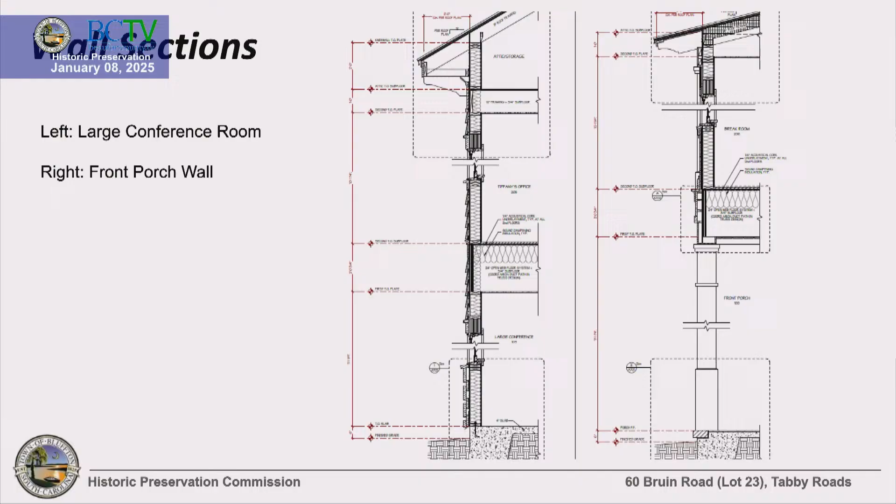I had 2 questions. One, just looking at this wall section, the boral detail shows that stopping at the slab. Yes, I actually have since redlined this and modified the detail, it needs to change as the grade goes along the side of the building, but I was hoping it would be within an inch of finished grade. I wanted a full board at the bottom, essentially.

But I think that's also what we would like to see, because it would be weird. I mean, I think we're in agreement. I don't want the weird seeing of the foundation to stop.

Step in. Yeah, I've also added a note here in the detail that says wherever any concrete might be exposed, it needs to be a tabby finish. But yeah, that's the intention, is for it to essentially go into the ground, and the Boral material can have that exposure.

We're not going to get the building department pulling apart the detail at the last second. No, we've actually done this detail a couple of times, and Boral is not bothered at all by dirt and being right on the ground. Cool.

And I had a question on the roofs of the two buildings. One is a 7-12 pitch. The main building is a 7-12 pitch, and then the accessory building is 8-12. And I was curious, because they're basically the same detail.

Let me see what the thoughts were, it evolved a couple of times. Don't remember why. Oh, I think it all used to be 8, actually, and then we were at a height issue. We're within like 2 inches of the height that we can be, I think, for the primary building. But I could see what the accessory would look like being lowered. I hadn't noticed that, but yeah.

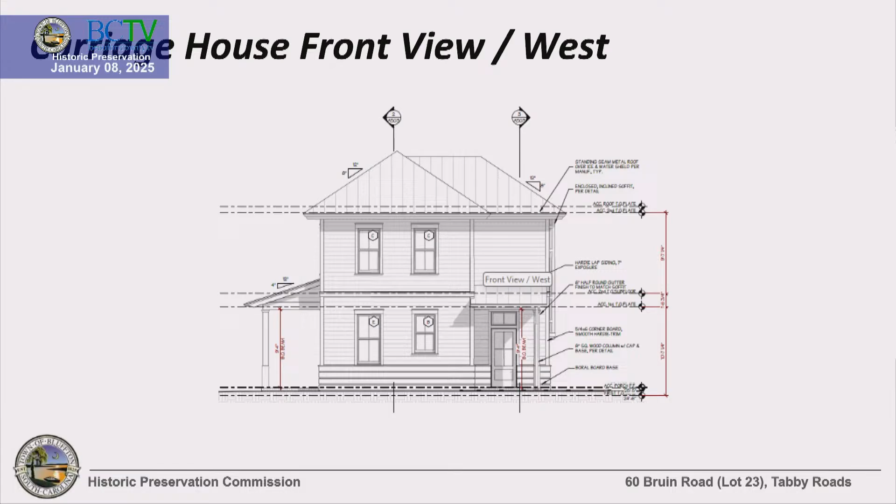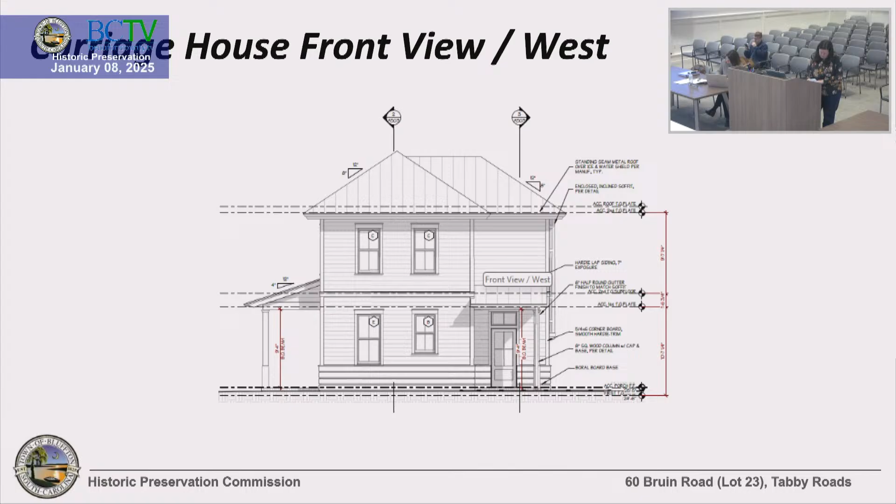I think it would be nice if those matched, given their detailing's really very similar. Yeah, I think that's all right, then I'll just lower the accessory, not raise the main. Any other? Actually, it might have been—let me look at the section—it might have been for mechanical, now that I'm thinking about it. A little bit of room up there.

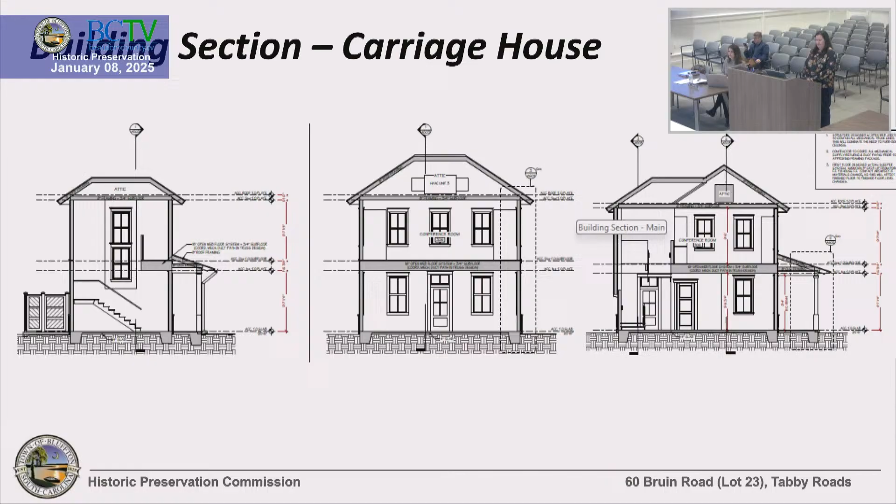Any further discussion or questions? Do I have a motion? Make a motion to approve with staff recommendations.

Any other recommendations you guys want to add? And I did write them down. I hope I have them all. The window, to add a window above the door for the carriage house. And then I believe there is going to be another window added on the opposite side, to move the slab out slightly from the column, 1 to 2 inches, and then to match roof pitches and lower the carriage house roof pitch.

And for the—let's see, did I get it? I had that we were striking staff comments, number 6, the slider windows, and number 7, the front door transom. Transom, correct. And I believe that is it. And the exterior, and to allow the Boral material. So the motion is to approve with the new conditions. Correct.

And we also need to have findings on number 16 and 17. And the findings on number 16 and 17 as well. Yeah, do you want to state the findings? You started the motion. All right.